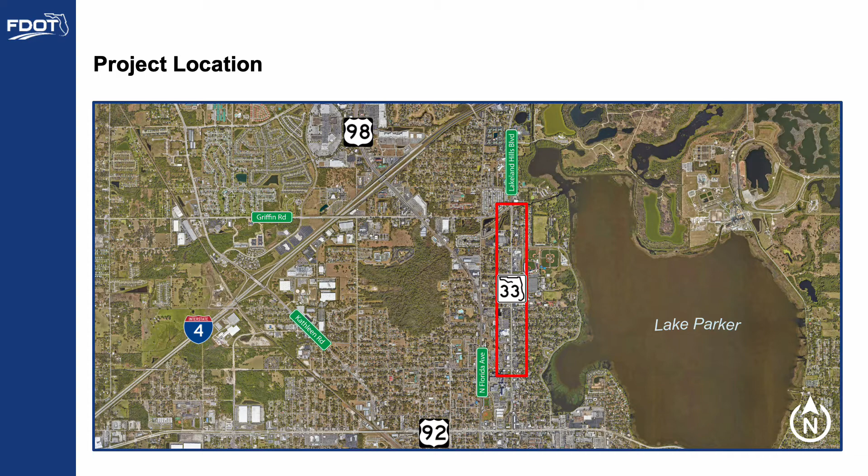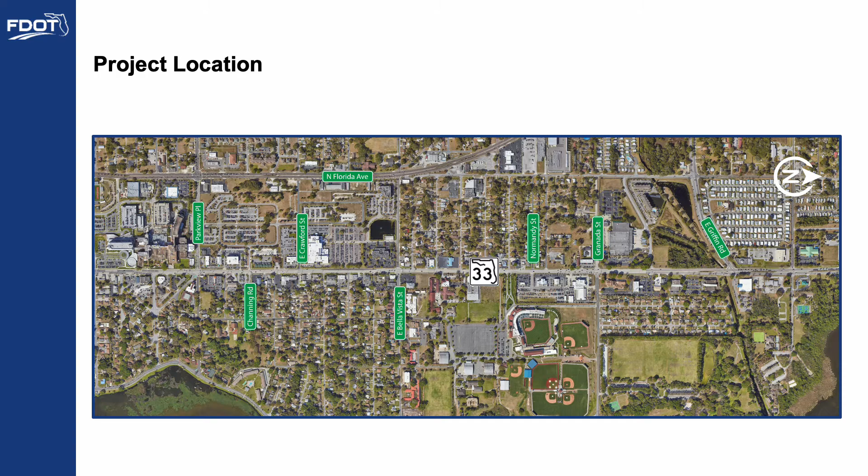As mentioned, the project is in Polk County on State Road 33, Lakeland Hills Boulevard, from Parkview Place to north of Granada Street. The main objective of the project is to improve safety, mobility, and access along the corridor.

State Road 33 is a north-south four-lane urban roadway with 11-foot travel lanes and curb and gutter. There is currently a 12-foot bi-directional left turn lane from Crawford Street to East Bella Vista Street. 5-foot sidewalks are provided on both sides of the roadway. The posted speed limit along the project corridor ranges from 35 to 40 miles per hour.

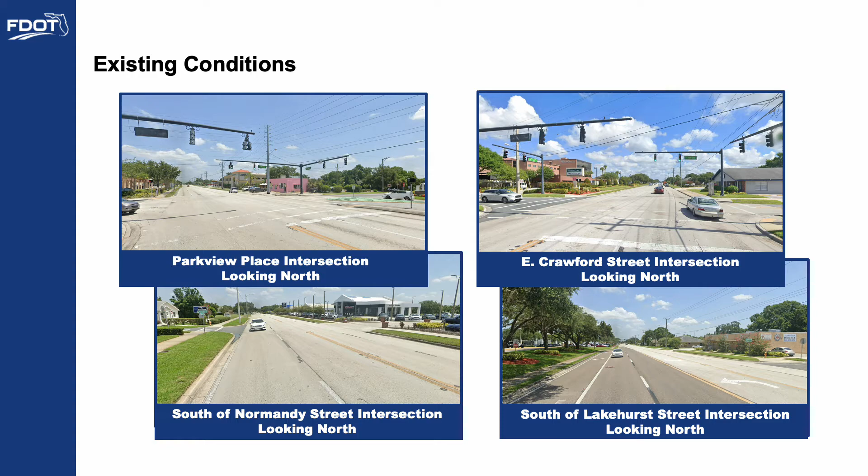There are 4 signalized intersections within the project limits: at Parkview Place, East Crawford Street, East Bella Vista Street, and at Granada Street. All 4 intersections have pedestrian signals and crosswalks. This is an illustrated typical section or cross-section showing the existing roadway elements.

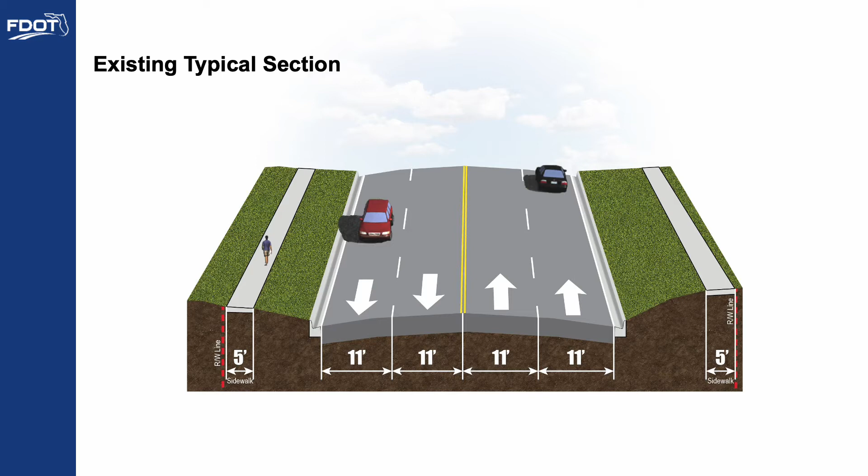The project consists of complete reconstruction of the existing roadway and drainage system. Proposed improvements along State Road 33 include constructing a 12-foot raised median and 10-foot travel lanes, as well as replacing existing 5-foot sidewalks with 8-foot sidewalks from Parkview Place to north of Miami Street.

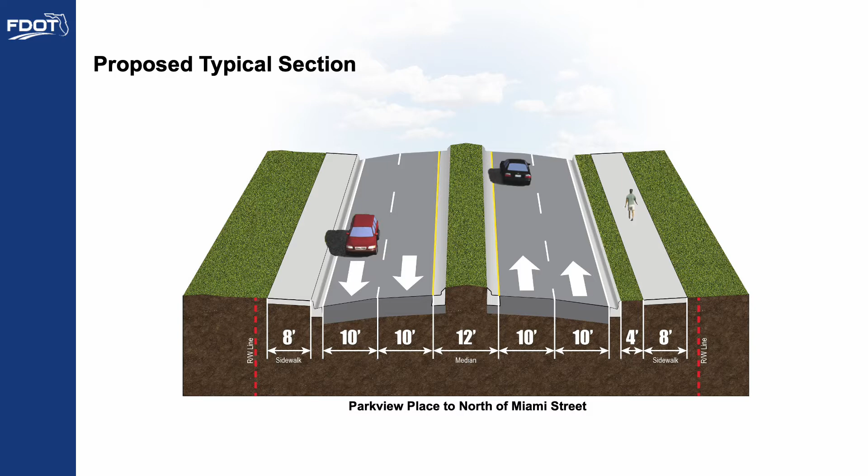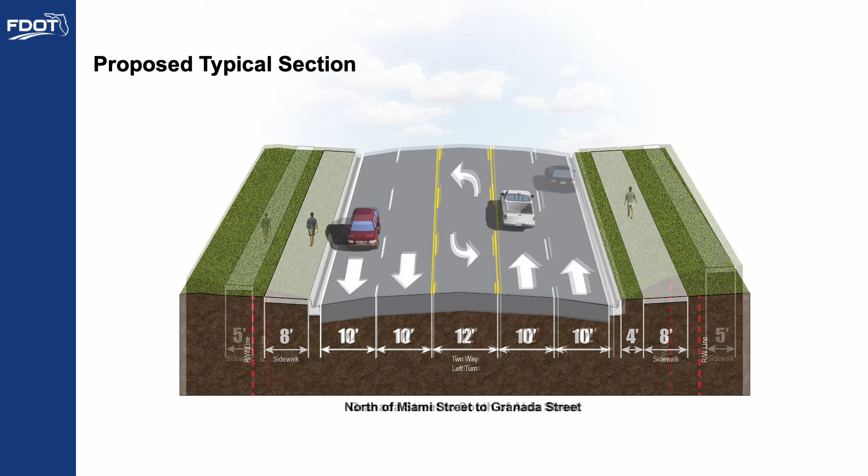From north of Miami Street to Granada Street, proposed improvements include constructing a 12-foot bi-directional left turn lane, 10-foot travel lanes, and replacing existing 5-foot sidewalks with 8-foot sidewalks. From Granada Street to south of Aida Street, proposed improvements include constructing a 12-foot bi-directional left turn lane and 12-foot travel lanes.

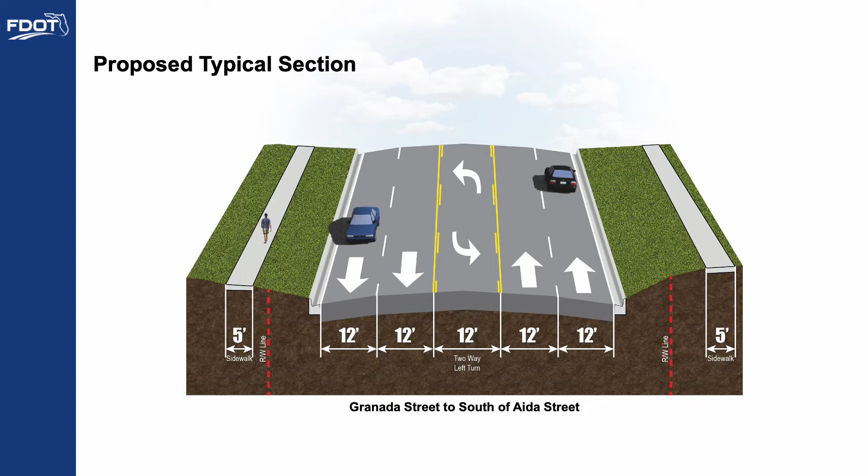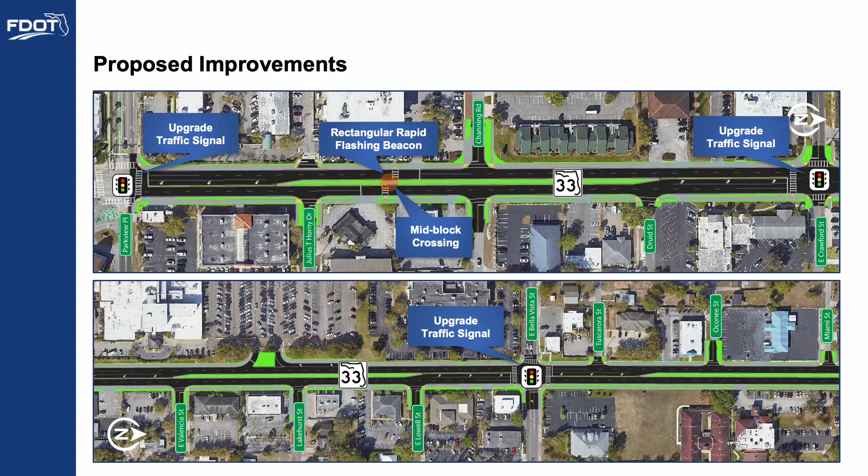Proposed improvements from Parkview Place to north of Miami Street are shown here, including construction of a new mid-block pedestrian crossing and rectangular rapid flashing beacon south of Channing Road, and upgrading traffic signals at Parkview Place, East Crawford Street, and East Bella Vista Street.

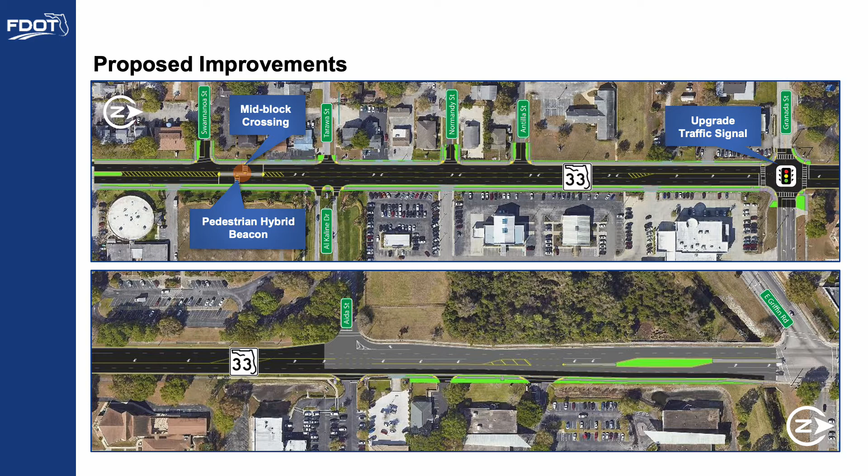One of the most important responsibilities of the Florida Department of Transportation is to ensure that the design of each state road properly balances access and mobility. Access management is used to provide this very important balance.

A basic principle of access management is to limit the number of conflict points along a roadway by minimizing the number of median openings and restricting certain movements within the median. In some cases, like this one, construction of a raised median can reduce conflicts and crashes.

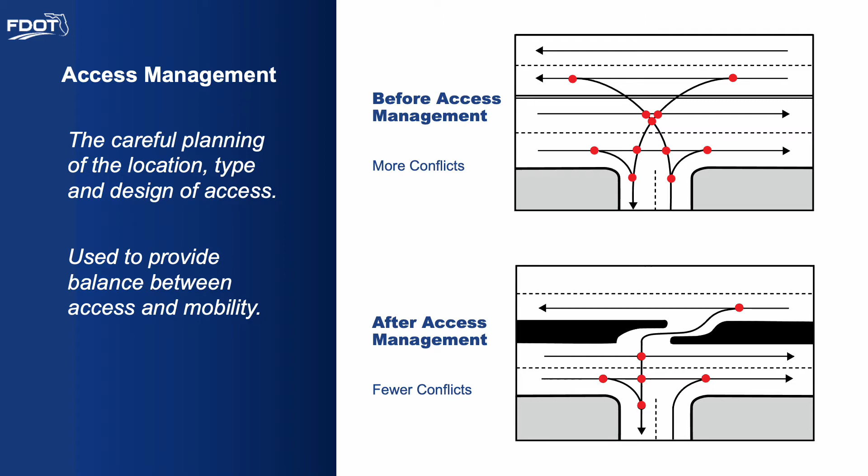Conflict points are locations along a roadway where the paths of two vehicles can legally cross, just not at the same time. Each conflict point is a location where a crash can occur. Currently, there is a bi-directional left turn lane from Crawford Street to East Bella Vista Street. Vehicles are able to turn left onto any side street or into any property without restriction. This configuration allows for a high number of conflict points.

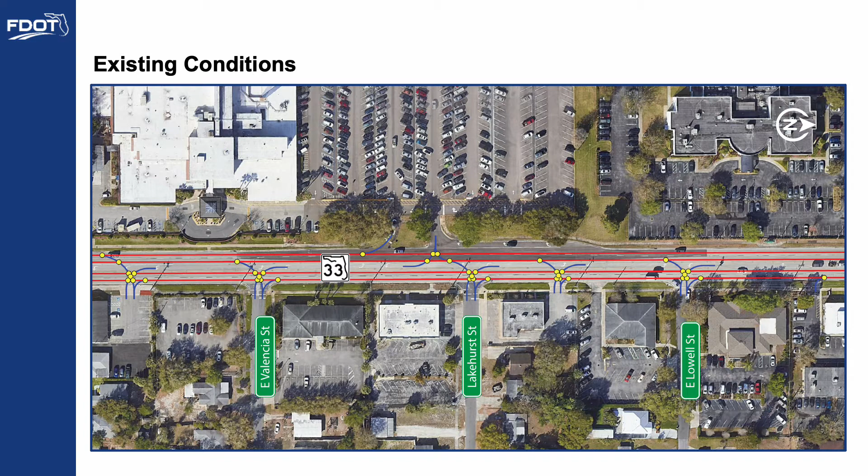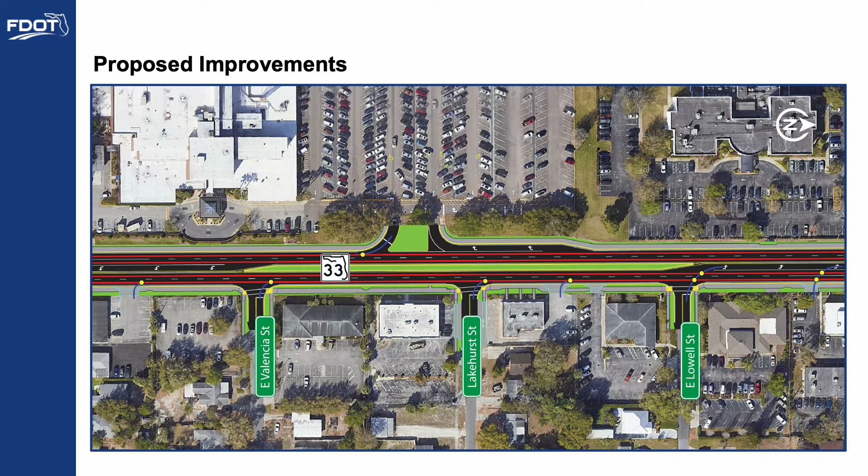The proposed raised median will reduce many potential vehicular conflict points, reducing the number of crashes and making the road safer for all users. In addition, this change can increase mobility and efficiency, reducing congestion and allowing more vehicles to safely navigate the roadway.

As previously mentioned, this project includes construction of a new mid-block pedestrian crossing with the rectangular rapid flashing beacon, or RRFB, south of Channing Road. A mid-block crossing with RRFB was also recently constructed south of the project limits, between Buena Vista Street and El Paseo in front of Lakeland Regional Medical Center. The RRFB proposed for this project will function in a similar way.

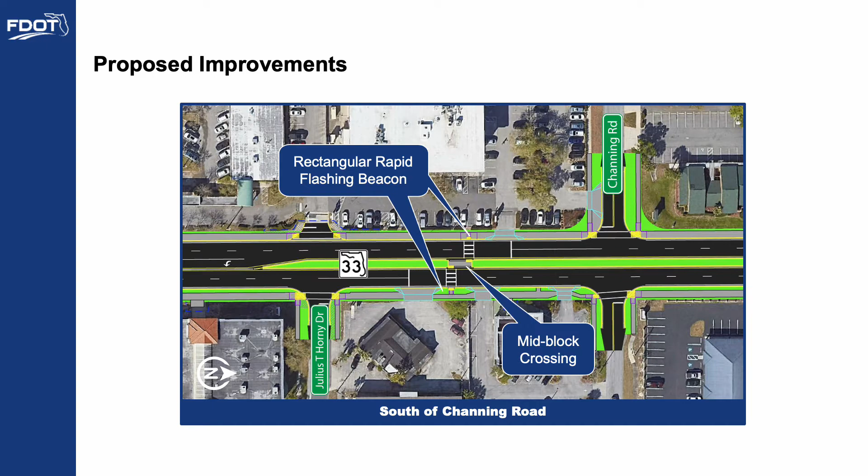An RRFB consists of two rapid flashing yellow lights that are mounted below a yellow pedestrian crossing sign. For this project, RRFBs will be located on a mast arm over the roadway, rather than on single post signs as shown here. However, the way it functions remains the same. The flashing lights remain dark until they are activated by a pedestrian wishing to cross. While motorists are legally required to stop for pedestrians in any crosswalk in the state of Florida, RRFBs are installed to bring more visibility to the marked crosswalk to help pedestrians who need to cross.

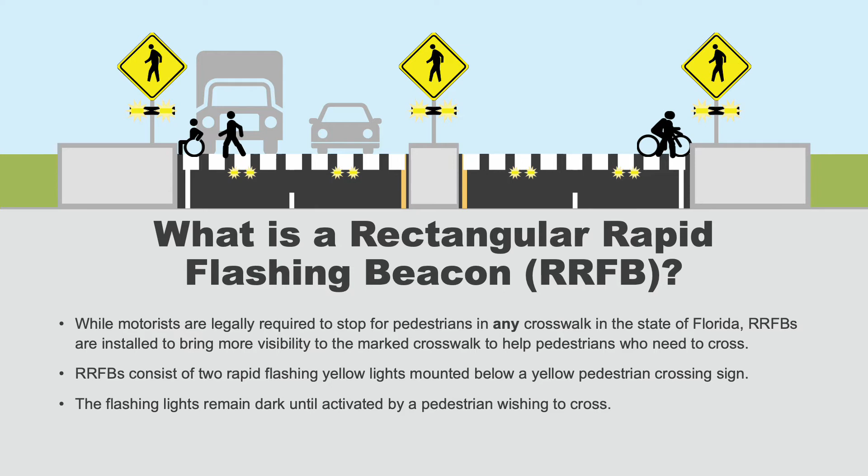Let's look at how a pedestrian will interact with the RRFB. Upon approaching the crosswalk, the beacon will be dark and cars will be proceeding normally. Pedestrians are encouraged to push the button to activate the beacon, thus making their intent to cross more noticeable to motorists.

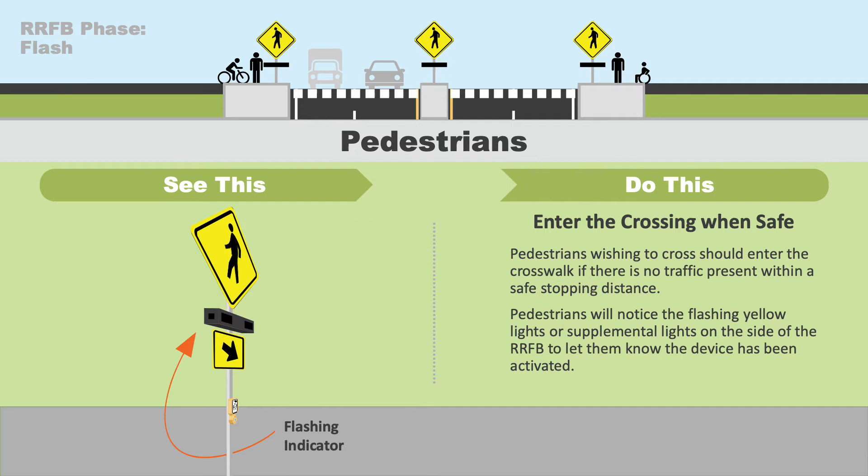Upon pressing the button to activate the signal, pedestrians may enter the crosswalk when motorists have come to a complete stop, or, if no traffic is present, closer than a safe stopping distance. Pedestrians will notice the flashing yellow lights or supplemental lights on the side of the RRFB to let them know the device has been activated. The flashing lights on the beacon will continue for a short time, allowing pedestrians to cross.

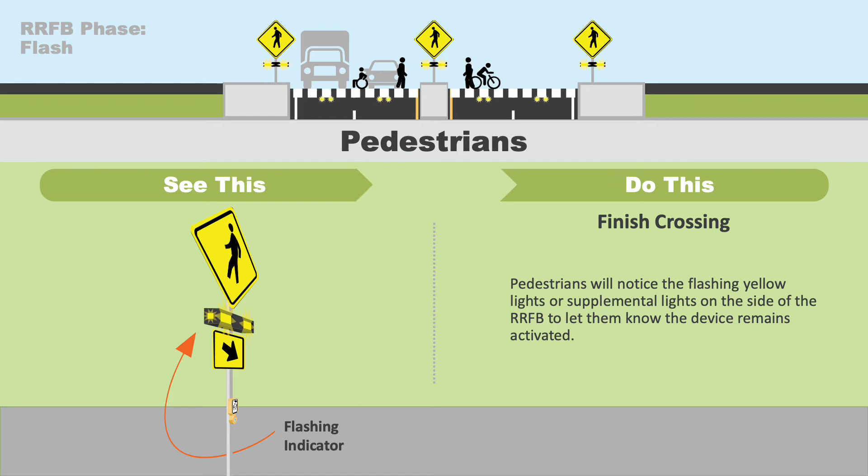Finally, after pedestrians have completed crossing and the RRFB has stopped flashing, any approaching pedestrians will have to press the button again to activate the RRFB, repeating the cycle.

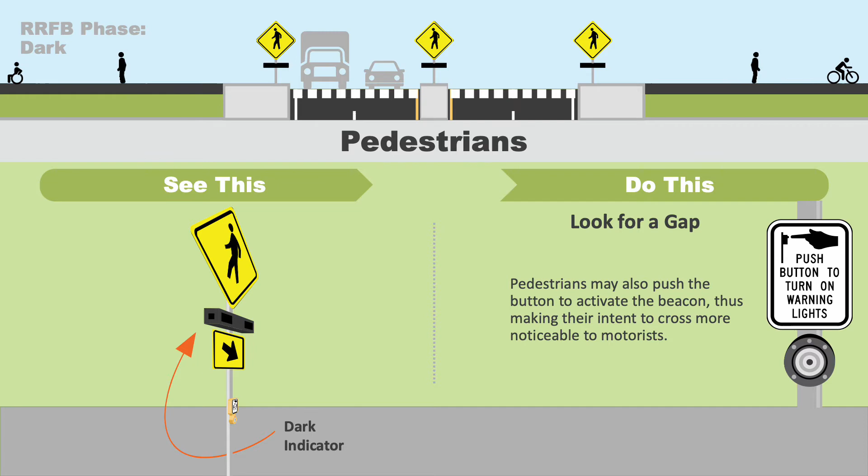Now, let's look at how a motorist will interact with the RRFB. The RRFB's default state is dark until a pedestrian presses a button to cross. The motorist may proceed with caution if no pedestrians are in the crosswalk. Once a pedestrian presses the button, indicating they're ready to cross, the yellow lights begin to flash rapidly. The motorist must stop or clear the crossing if they are too close to stop safely.

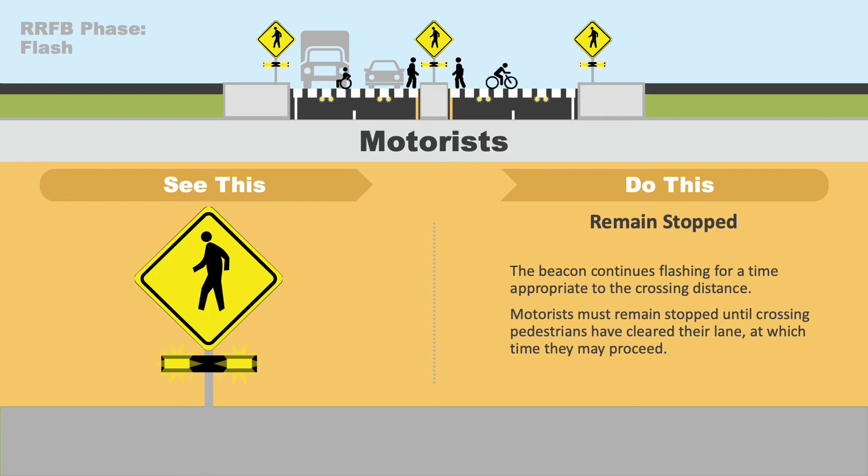Motorists must remain stopped while pedestrians cross. The beacon will continue to flash, and motorists may proceed once the pedestrians clear their lane. Finally, the beacons will return to dark, and motorists may proceed with traffic when there are no pedestrians in the crosswalk. The beacons will remain dark until a new pedestrian approaches the crossing and presses the button.

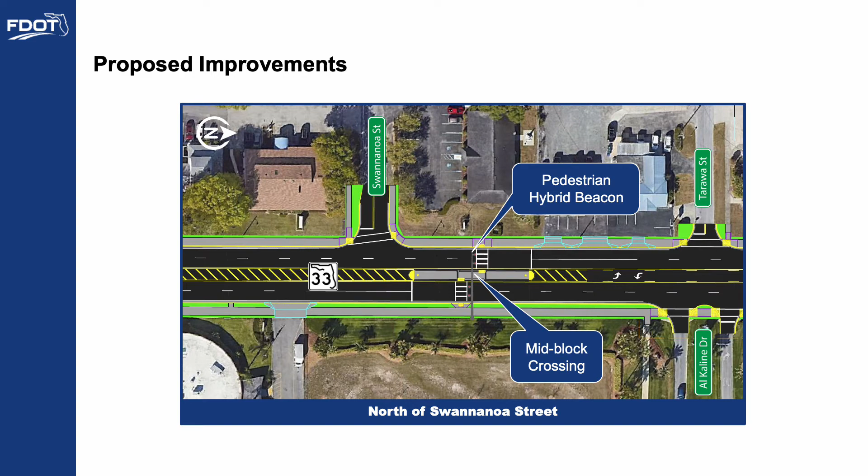The project also includes construction of a new mid-block pedestrian crossing with a pedestrian hybrid beacon, or PHB, north of Swannanoa Street. A PHB is an overhead traffic device designed to assist pedestrians in crossing at mid-block crossing locations by requiring motorists to stop during the red phase. For this project, PHBs will be located on a mast arm on the east side of the roadway, rather than in the median as shown here.

However, the way it functions remains the same. It has two side-by-side red lights above a single yellow light. However, unlike a regular traffic signal, the signal face for drivers remains dark until the pedestrian activates the beacon. Pedestrian movements are controlled by ordinary pedestrian signals.

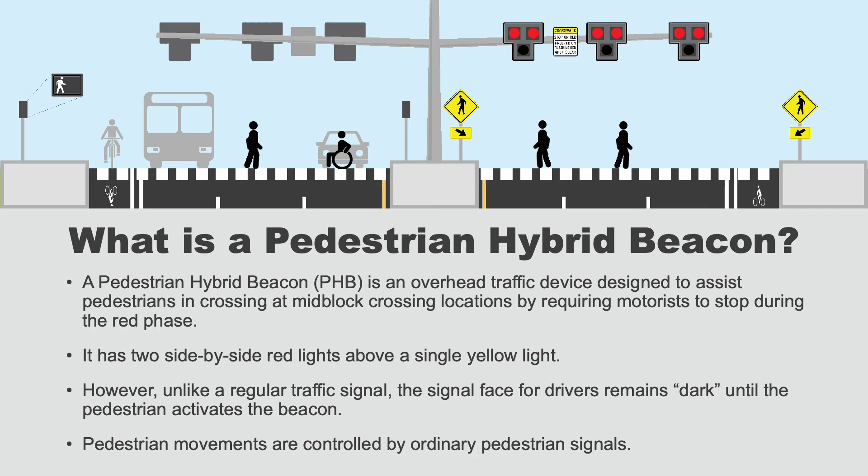Now let's look at how pedestrians and motorists will interact with the PHB. Upon approaching the crosswalk, pedestrians will see the Don't Walk sign. To activate the PHB, pedestrians must push the button and wait for the walk signal. For motorists, the signal face will remain dark until pedestrians activate the beacon, and motorists may proceed with traffic.

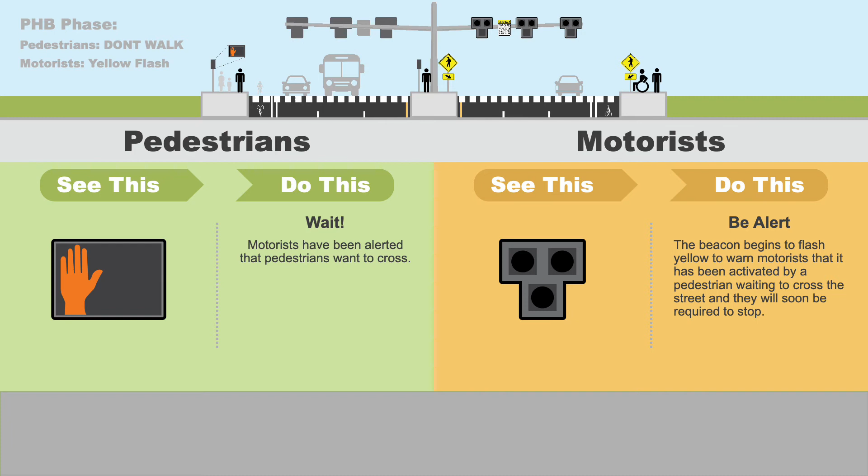Upon pressing the button, pedestrians will continue to see the Don't Walk sign and must wait. The signal face will begin to flash yellow to warn motorists that it has been activated by a pedestrian waiting to cross the street, and they will soon be required to stop. As pedestrians continue to wait, the brief flashing yellow will be followed by a steady yellow, directing motorists that they must stop if they can safely do so because the signal is about to turn red.

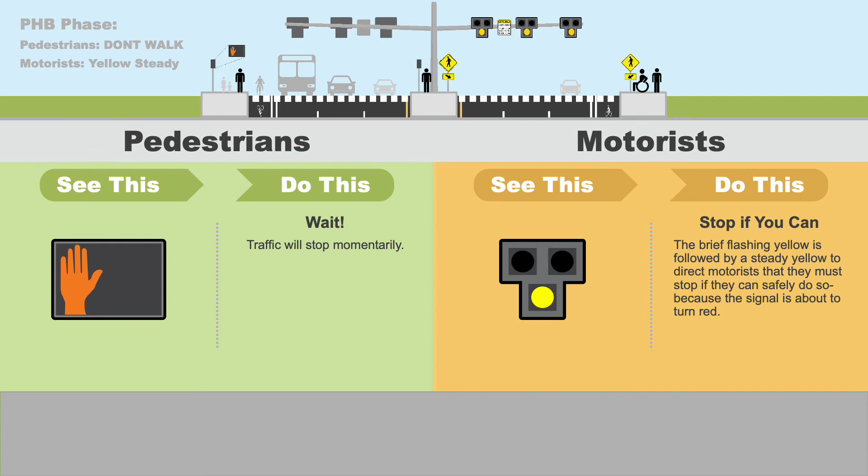For pedestrians, the walk signal is then lit, allowing them to begin crossing the roadway. Pedestrians should look in both directions to ensure that all vehicles are stopped. For motorists, the steady yellow is followed by a steady red signal, requiring motorists to come to a complete stop at the stop line while pedestrians are in the crosswalk.

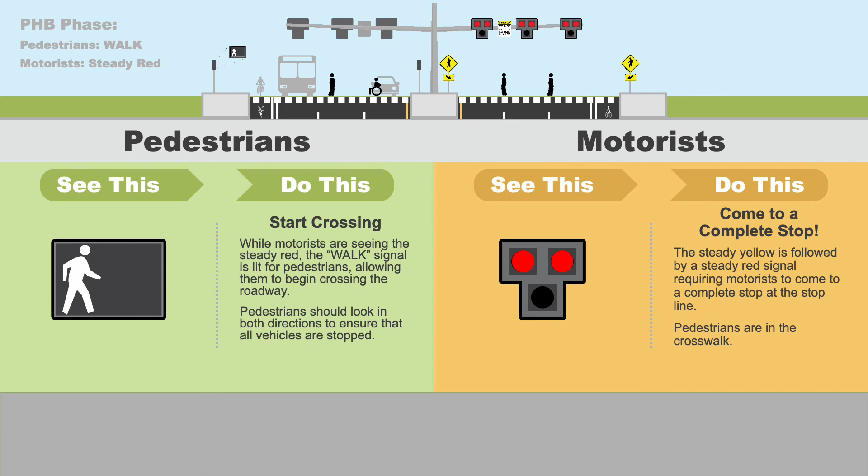The pedestrian signal will then change to a flashing Don't Walk symbol, and a countdown timer to notify pedestrians how much time they have to finish crossing. Pedestrians should not begin crossing during this countdown. The flashing red light for motorists indicates that they must remain stopped while pedestrians are in the crosswalk, but may proceed with caution once pedestrians are clear. Each vehicle in the queue must stop upon reaching the stop bar until the phase ends.

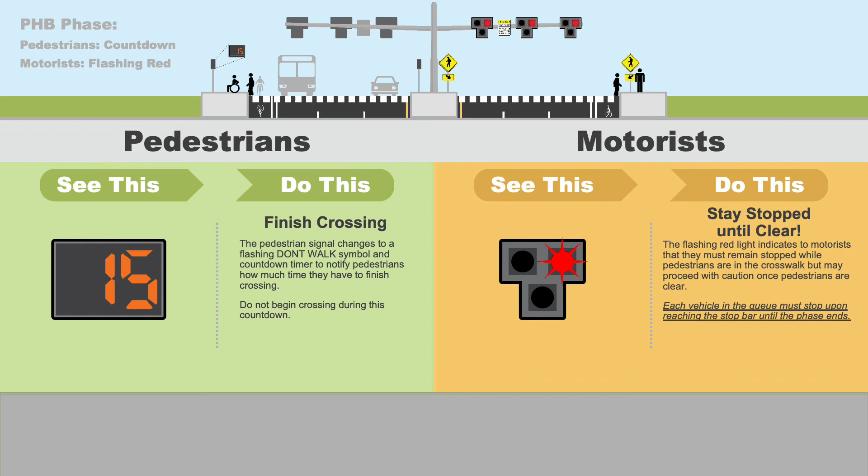Finally, after pedestrians have completed crossing, pedestrians will once again see the Don't Walk sign, and the signal face of the beacon will be dark. Any approaching pedestrians will have to press the button again to activate the PHB, repeating the cycle.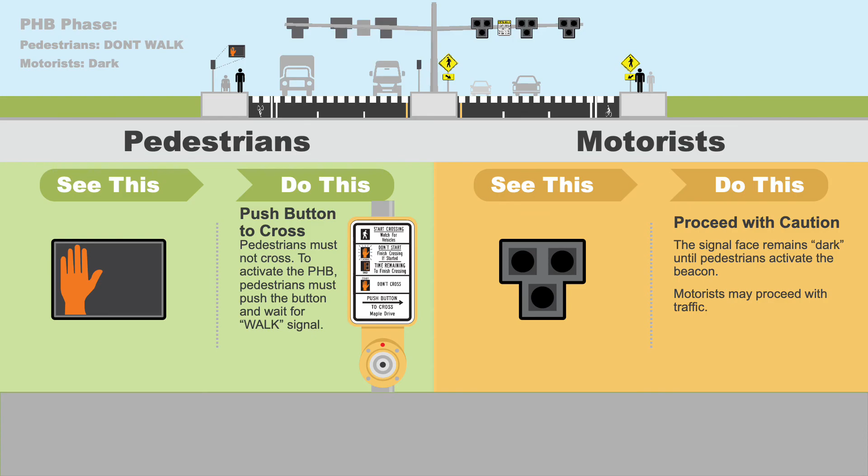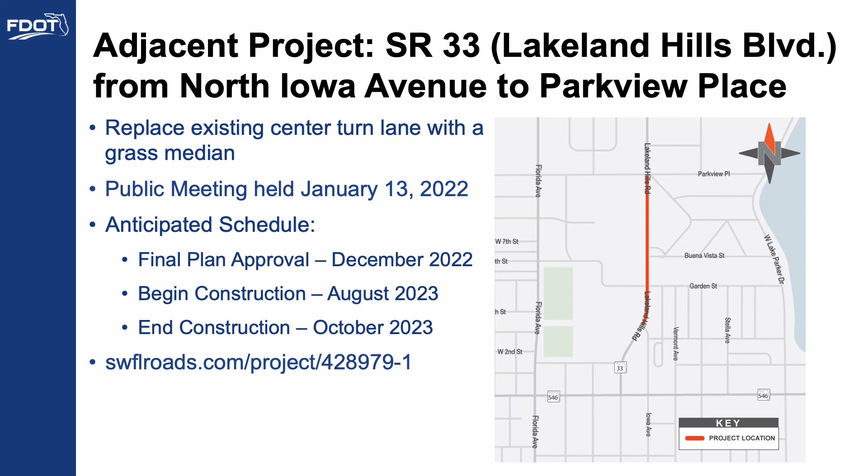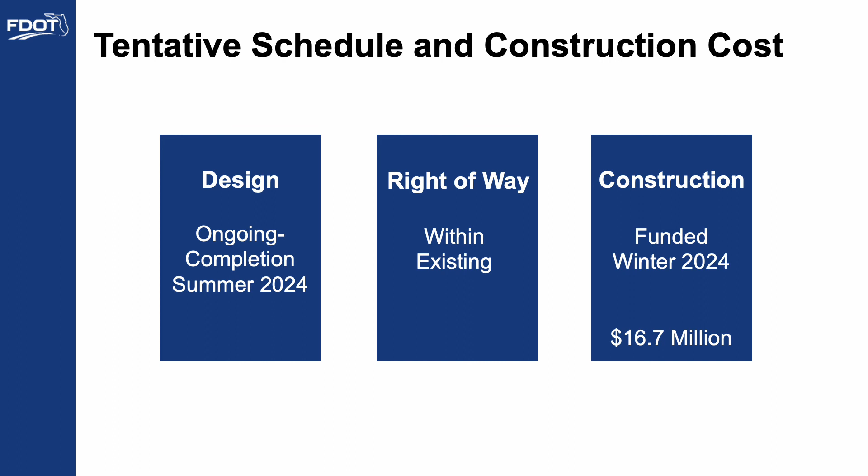We encourage your input and feedback about this project, and there are multiple ways for you to participate. All public comments and questions are part of the public meeting record, and every method for providing public comments and questions carries equal weight. While comments and questions will be accepted at any time, those submitted by October 28, 2022 will become part of the project's public meeting record. All comments and questions will be responded to in writing following the meeting.